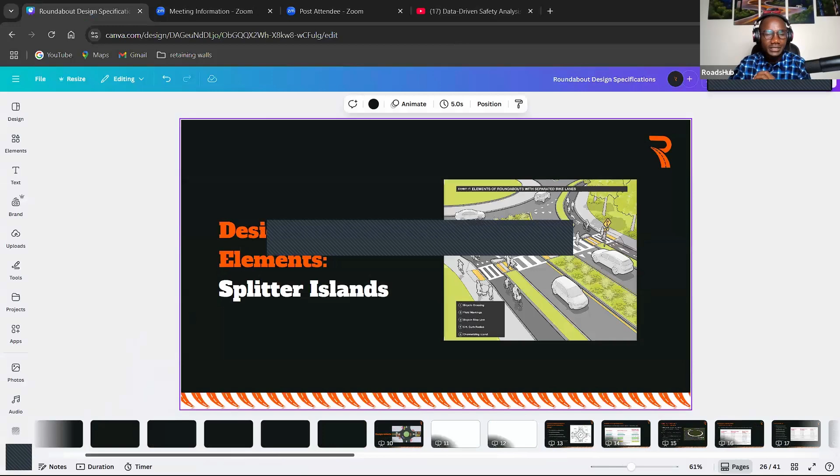This is going to be one of the best sessions that you've attended about roundabout design. That is my commitment, and I hope that I'm going to deliver exactly that.

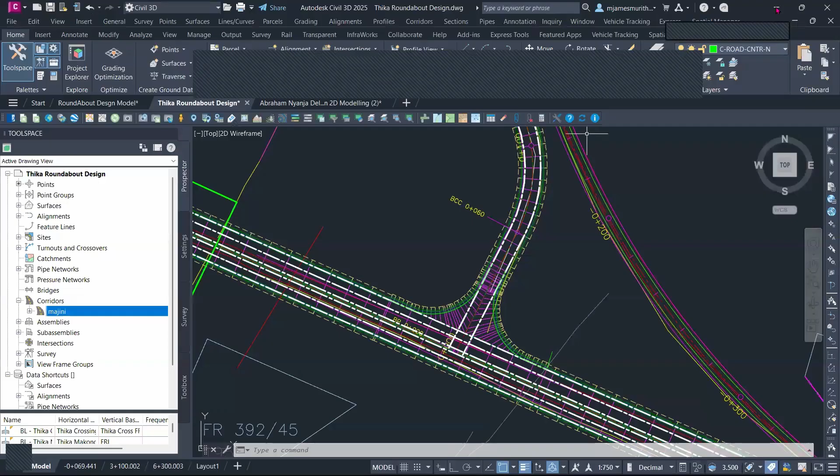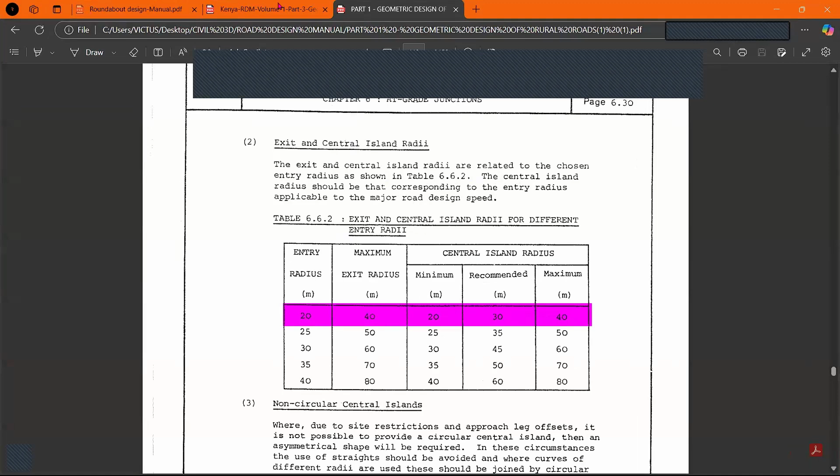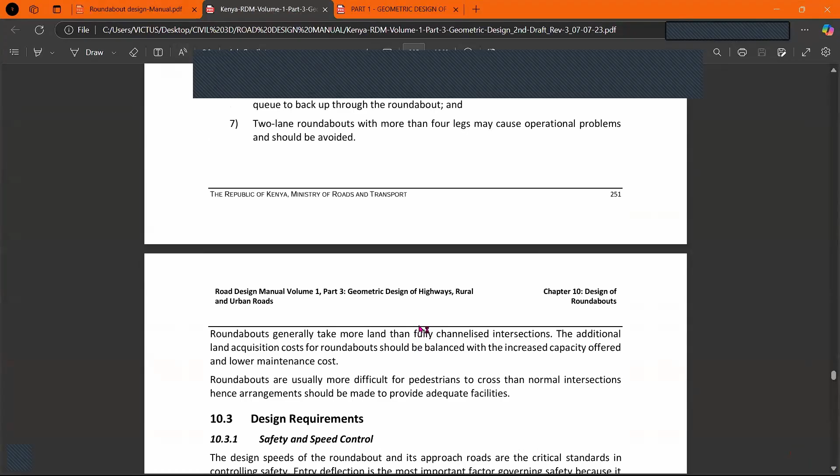So let me jump from this presentation, and I want to look at something that guides our approach in terms of choosing the appropriateness of a roundabout. And these are the guiding principles that you will always endeavor to look at: the road design manuals. The road design manuals will typically give you guidance on some of the scenarios and situations and how you need to apply the engineering designs.

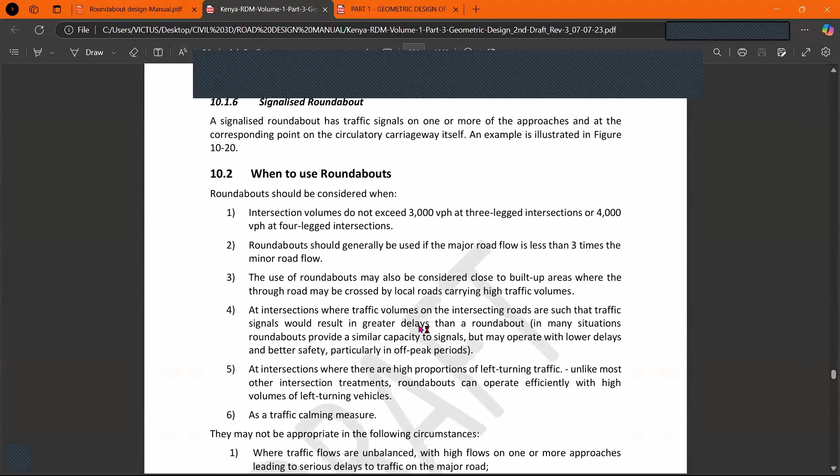So let us, for example, look at roundabouts. This is the Kenyan Road Design Manual. I'm going to send it to you guys. And it is telling us when to use a roundabout and when not to use a roundabout.

So for example, the traffic volume, that is intersection volumes, do not exceed 3,000 vehicles per hour. So if the traffic is less than 3,000, then we can be able to recommend a roundabout at that point. The second one is when the major road flow is less than 3 times the minor road flow.

So what do these two options represent to us? It means you must be able to carry out a traffic survey. So in the traffic survey, you will have estimated the traffic volumes within the two intersecting roadways. That is how you check the two options.

The second one, the use of roundabout may, and this is something that I've always emphasized. When you're reading and interpreting road design manuals, just like the Constitution, because this is the Constitution that guides our craft, you need to understand key words. The first one, should. Any time that you're seeing should, it means it's a recommendation and it carries some weight.

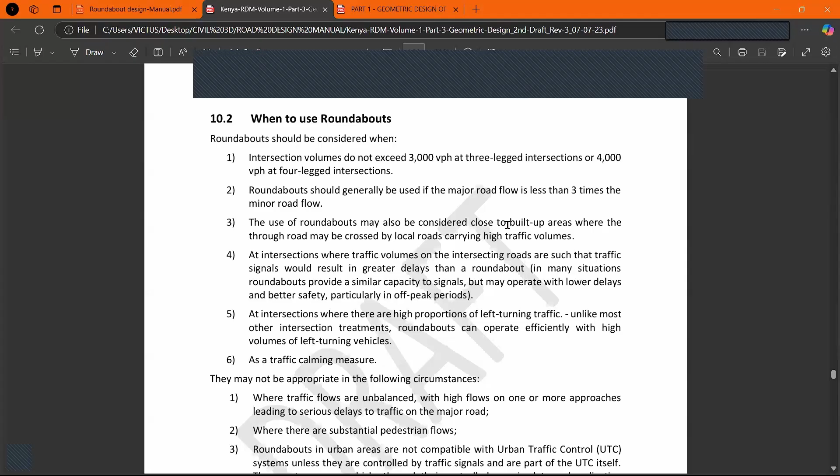Okay. All right, great. So those are three key ones that you need to look at. The use of roundabouts may also be considered close to built-up areas where the through road may be crossed by local roads carrying high traffic volumes. You will also be looking at this as a traffic calming measure. So if you want to control the traffic in a certain area, then you can propose a roundabout.

But then there are scenarios where it may not be appropriate to provide a roundabout. Number one, the traffic is unbalanced. That means you have high flows on one road, or more approaches leading to serious delays. So in such a case, you cannot provide a roundabout.

When there is also substantial pedestrian flow. In such an area, when you're designing a roundabout, you're going to provide a splitter island. And once we provide a splitter island, we're going to provide, of course, the crosswalk and all of that. If the pedestrian flow is very high, it means they will be crossing far too much, and there's a high chance of the roundabout being fully blocked.

And then in urban areas, for example, where it is not compatible with urban traffic control, then you may not be able to propose that. But if it is connected with the urban traffic control systems, then you can be able to recommend a roundabout. In presence of reversible lanes. So reversible lanes technically means these are lanes that

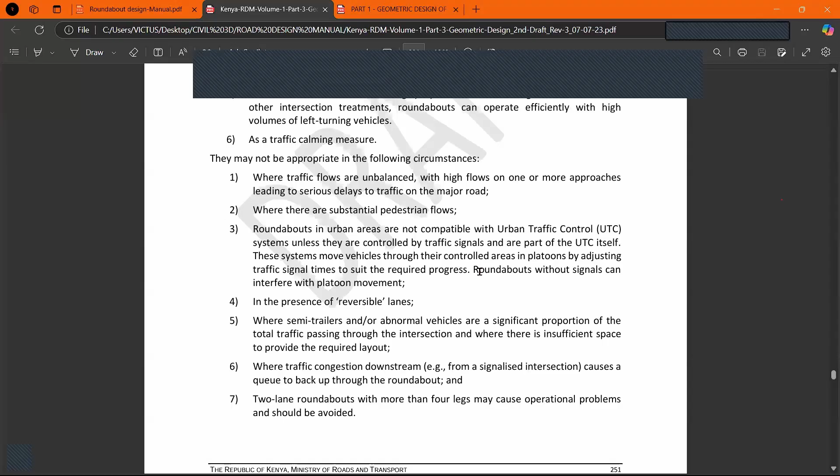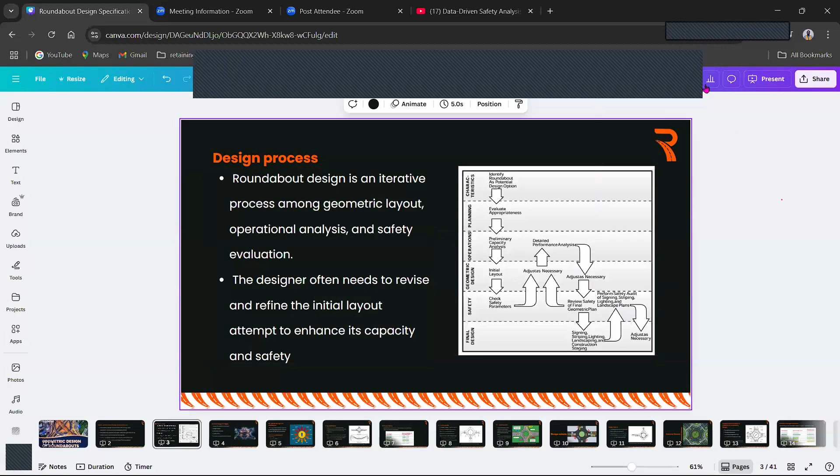I think it's a case study in Tanzania, where there is traffic that is moving back. You're having like U-turns around the same section. And then where there are very many semi-trailers and abnormal vehicles, you will require a very big space of land to construct a roundabout in that specific scenario. So those are some of the areas that you need to avoid, and some of the areas where you need to recommend the use of a roundabout.

So that is always the first stage. The characteristics. What are the surrounding site conditions? Is it a viable option? Then after that, you will do evaluation of appropriateness. That is where, after doing the survey, you evaluate the data. You analyze the data. You see these volumes. Is the ratio of 3:1 appropriate?

What is happening? Is the traffic flow in the major road extremely high, and then in the minor road it's very low? In such a scenario, you cannot be able to provide one. So after you have done the evaluation, for example, the traditional method that we used after having your traffic survey is just to use Excel and Power BI to compute the traffic characteristics, traffic flow, volumes, capacity, AADT, and all of that to get these figures that you use to make decisions.

And then after that, you can see operations. You also carry out preliminary capacity analysis. In the capacity analysis, you can use HCM, Highway Capacity Manual. That is the main guideline when you're evaluating the capacity analysis of any roundabout.

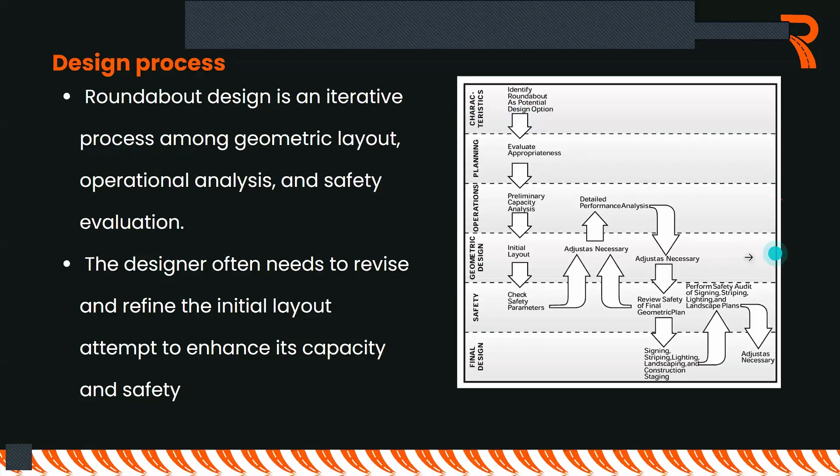And then after that, it's an iterative process. That's why you see safety, geometric design, and the final design, they are iterative steps that you need to look at. So then, if I was to summarize all of those stories in 5 specific things that we are going to talk about in this program, number 1, you need to account for the speed through the roundabout. That is an important aspect. What is the speed? How do you control the speed through your roundabout?

Remember, one of the operational principles of a roundabout is to ensure that vehicles are entering. You are forcing, the geometry forces the vehicles to slow down. Therefore, it means the speed analysis is one of the critical pillars that we must be able to analyze.

The second one is the design vehicle. For example, when you're designing a 2-lane or a multi-lane roundabout, you always consider a large truck vehicle, for example, WB40, and then a small vehicle. That's the design vehicle. You need to think about what are the turning characteristics. After that, you'll be looking at different geometric elements. When we talk about different geometric elements, you need to think in terms of what is the relationship? Do they communicate? What is the functionality of each geometric element in a roundabout?

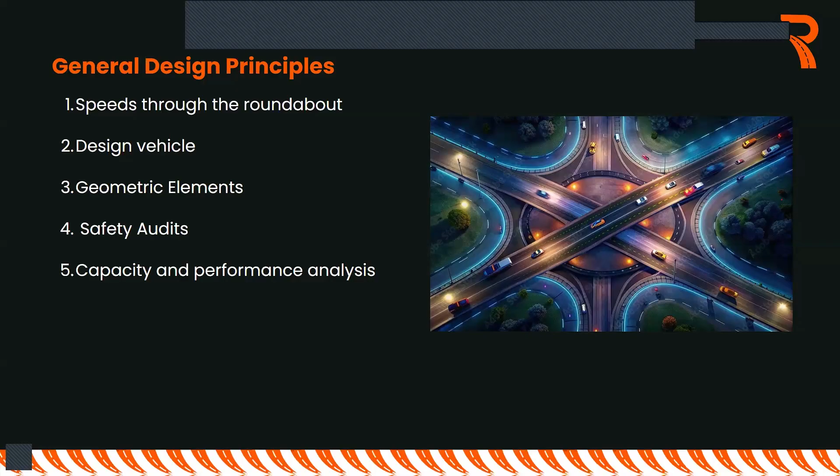Of course, safety audits, this is connected with the speed analysis. And of course, after that, you will then check the capacity and performance analysis. So let's look at this one. Speed through a roundabout. Look at this crazy vehicle that is here. That is what happens at a roundabout. If you design a poorly designed roundabout, that is what is going to happen.

Crashes. Remember, in a roundabout, vehicles can approach the roundabout at almost 360 degrees. I mean, this is my crazy view, don't take it seriously. But I want to magnify how risky it is if you don't think about the traffic or the speed flows and profile across a roundabout. So the most critical design objective is achieving appropriate vehicular speed through the roundabout. And this is achieved by doing 4 things.

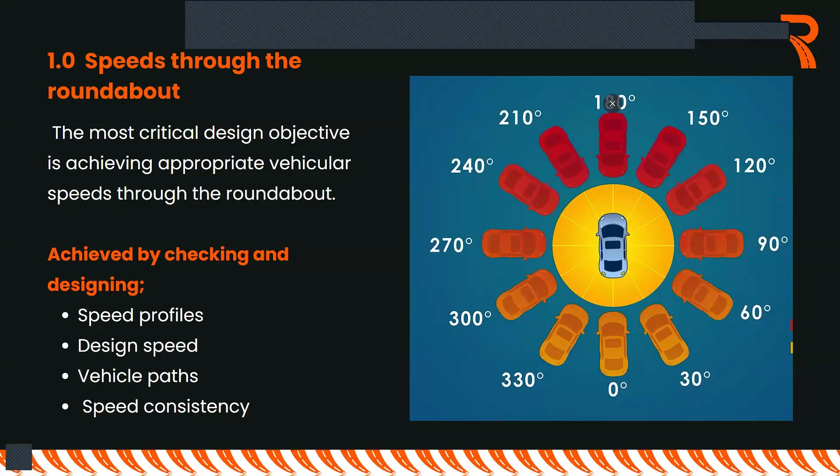Number 1, checking the speed profiles. How do vehicles behave when they are approaching a roundabout and exiting a roundabout? Number 2, what is the design speed? What are the vehicle paths? So there is the speed profile, but also the vehicle path. How do drivers navigate a roundabout? And then after that, you need to think about what is the consistency of the speed around the roundabout. So this is it.

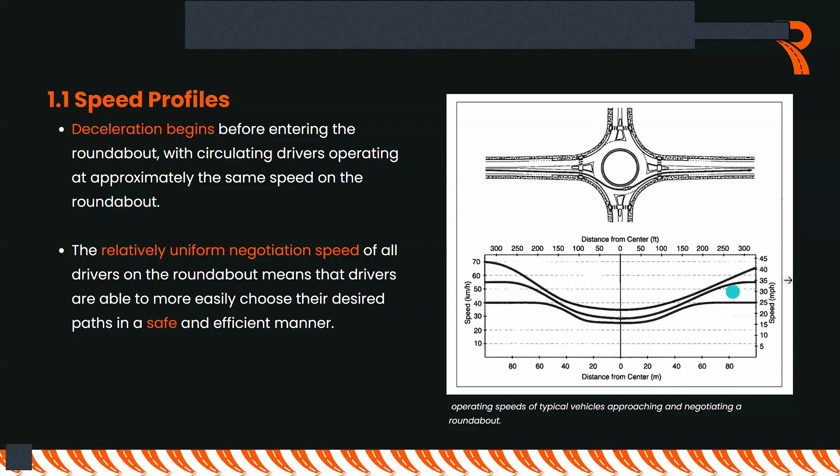And this is very important. Some of the old design manuals used to give recommendations for the design speed of a roundabout based on the speed of the major road. So for example, you are in class A roads, and therefore the speed at that point is 80 kilometers per hour. That is out; you cannot design a roundabout with such a design speed. So when we are talking about the design speed of a roundabout, we are talking about entry design speed.

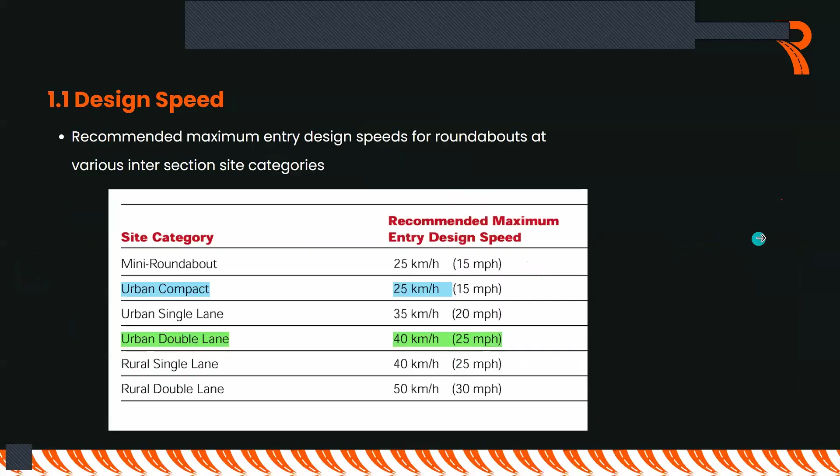And then we jump to the next one. Remember this. This is the flow. You must get it before we go to the practical session. You must get the flow. So keep that in mind, and you will see how that applies or how that plays out.

Now, the vehicle path. Drivers along a roundabout don't just drive. For many people, you know that drivers negotiating or interacting with a roundabout is a crazy thing. That is why when you go to the driving school, the board, I don't remember the board. Please give us the name of the board that you use in your local driving school.

I think for us it was called MTRB or something like that. And this is it. This is it. And if you actually search design of roundabouts even on YouTube, most of the videos that come up are about how drivers should be able to negotiate a roundabout.

This is interesting. Why is it interesting? Because as the design engineer, you keep switching your personalities during the design process. So you are thinking as a technical guy, and you are talking about design profiles, speed profiles and all of that. At this point, you also need to think as the person who is driving. Now, this is the other thing. You also need to think in terms of, am I driving a large vehicle or am I driving a passenger vehicle? Over and beyond that, you should also think about being an elderly person. How will this play out for them?

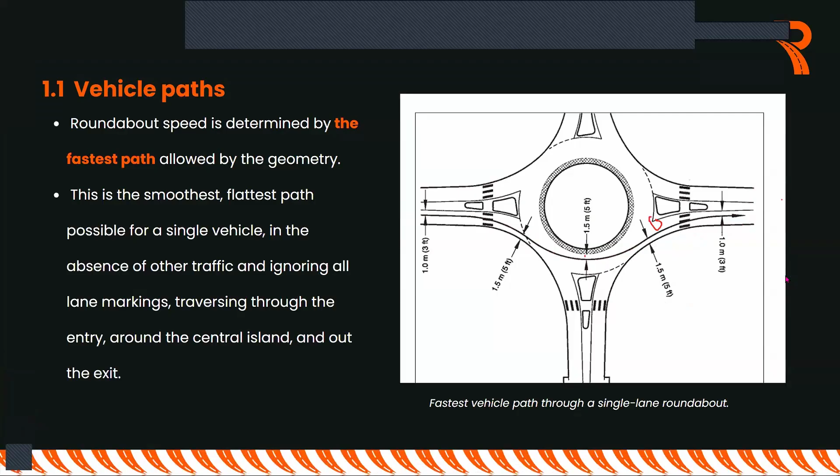So for you as the design engineer, you must be able to visualize. Most people want to use software to visualize. No, you are the creator. You must visualize the path in your mind before you put it on paper. I'll show you where the manual is also recommending that. So let's move. So we now understand the vehicle path. We understand how the drivers will be interacting with our roundabout.

Now, let us look at it on a bigger scale. The reason why it is important for you to understand the vehicle path is because when you go to AutoCAD, I remember this gentleman, Philemon. He was a brilliant guy in one of our trainings. And he was texting me and saying that he was designing a roundabout in AutoCAD, and it was a super exhausting exercise. You cannot create what you don't picture. You cannot create what you don't understand.

And this is why we are looking at vehicle path. How will different vehicles be interacting with the roundabout? So that as we go to design the different geometric elements, which you see all of them in this drawing, we can know what is their interaction, what is their relationship, how do they guide the vehicles through the roundabout. So let's get into it.

We are assuming the person who was here was driving on the right-hand side. So we are driving from the right-hand side. So we are here. Let me change the color to blue. There's no blue here. So this is where my friend Farouk is driving through. So when Farouk is at this point, and I want you to go back to your driving school, he has a lot of options.

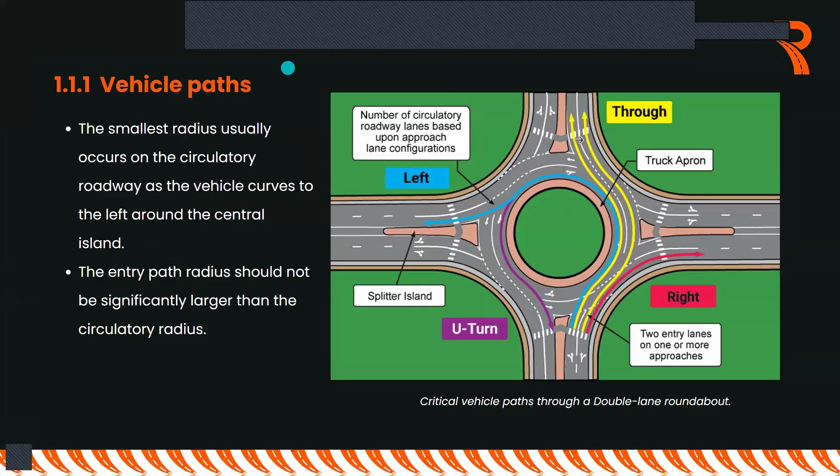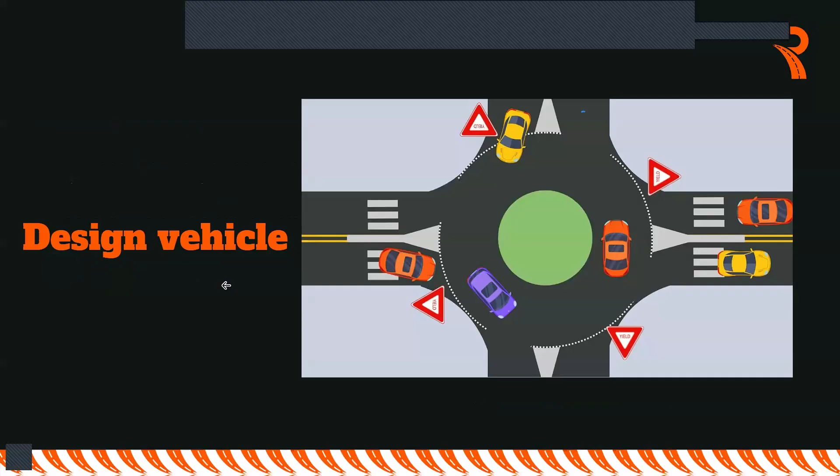So after we have understood the whole vehicle paths and all the chaos that happens through this section, we need to think about the vehicle now. We are getting into the vehicle. In this case, we were thinking as a driver. Now, let us think from a different perspective. We are talking about the design vehicle. So what is the design vehicle? A design vehicle is basically a guide. It's a guide that allows the design engineer to be thinking with someone in mind. So if you don't have someone in mind, you can think with a vehicle, all right? So this is a design vehicle. You need to know your design vehicle so well.

For example, how do you arrive at that? Number one, you need to carry out a traffic survey. The traffic survey is mostly carried out in 7 days, where you must have 5 working days and 2 weekend days, and then you must do some 24-hour counts, others 16-hour, and all of that. So the rule of thumb is we design for the worst case scenario. Therefore, you are going to design with the maximum vehicle from your traffic survey. So if it's an articulated truck, if it is a WB40, if it's a bus, whatever, then that becomes your design vehicle. So in that case, you'll be able to know the different design parameters.

The designer must be conscious of the design vehicle and possess the appropriate vehicle turning templates or a CAD-based vehicle turning path program to determine the vehicle's swept path analysis. When it comes to design of roundabouts and intersections, Autodesk Vehicle Tracking and many other CAD programs are always the best. So look at it here. I want you to picture this, and we'll be doing it right now in one of our designs and see how the swept path analysis is done.

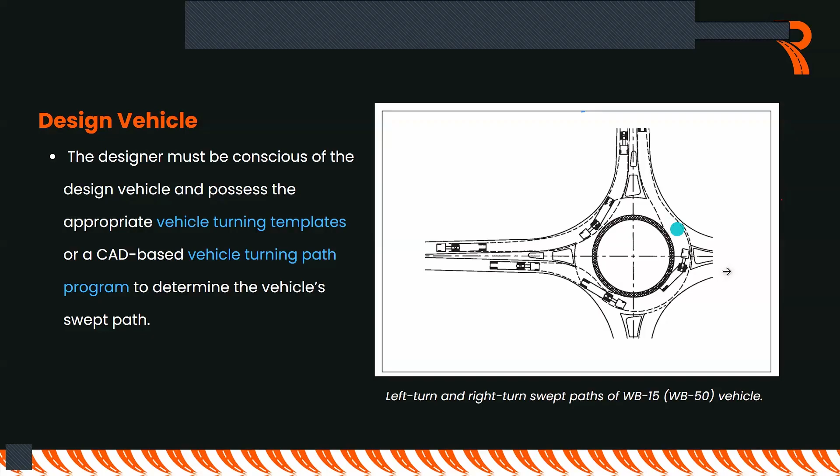And then after you know those important aspects, that is when now you start thinking about the geometric elements in a roundabout. So I am mapping out the process for you. Brilliant as you are, sometimes you may not be having all the data. But at least when you understand the process, you can be able to make what is called educated estimation. So you'll be able to know in such a scenario, I need to do 1, 2, 3 things.

So let's get into this one. These are the different roundabout elements for preliminary design. I'm not going to spend my time to go through these elements because they are self-explanatory and easy to read. But I want you to think about 3 main things that you need to keep in mind. Number 1, you must be able to select the optimal roundabout size. Anywhere you learn, or anywhere you read online in books and everything, the disadvantage of a roundabout is that it requires huge space. Therefore, for you as the design engineer, you must be able to get the optimal roundabout size.

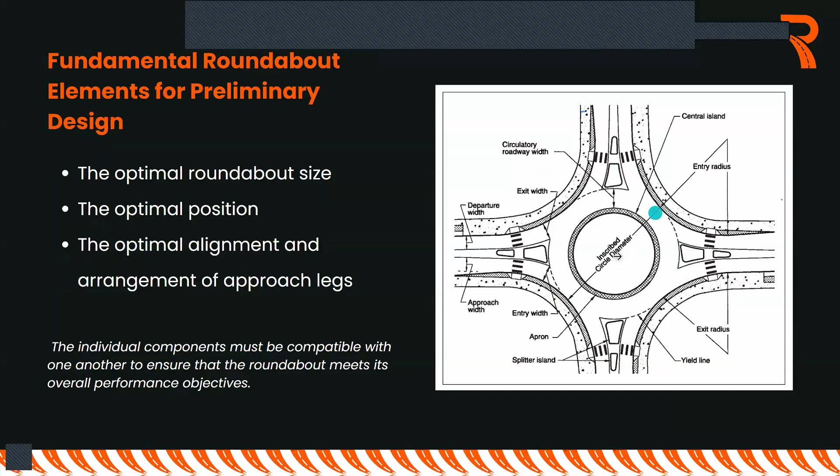The assumption and always the best case scenario is that the angle between the entries is 90 degrees. And for optimal performance, we are also talking of 4 legs. You also need to think about the typical design vehicle. Remember, the word here is typical. For a mini roundabout, we are using a single unit truck. And therefore, we have recommendations for the inscribed circle diameter range, including the circulatory lane, the diameter of the central island, and the apron. Depending on the type of roundabout that you adopt, you may not be able to include the truck apron. Please take a screenshot of this.

Let us say, for example, we are designing an urban double lane. You see that we are recommended an inscribed circle range of 45 to 55. So you have 10 meters to play around depending on the site conditions and any other analysis. So note that down. Inscribed circle is equal to 45 to 55 meters. Remember also the type of vehicle. It's WB15 or WB50. Those are the two options that we have there.

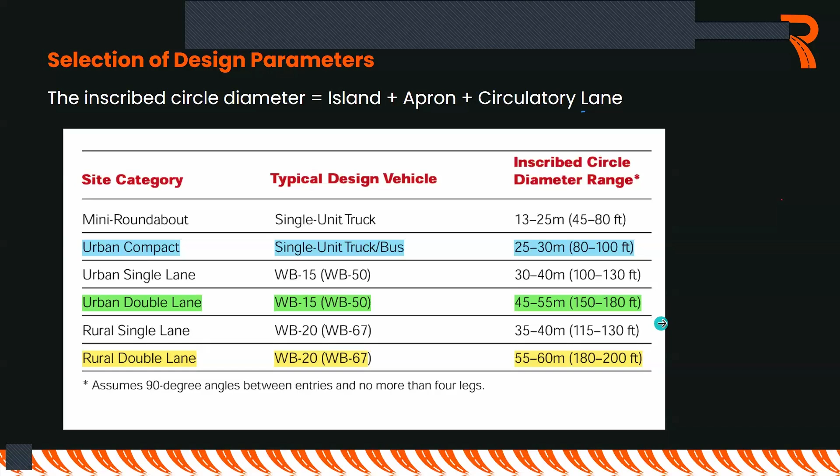Let us go. The circulatory roadway. So what parameter do you use to decide the width of this roadway? Number one, this is determined from the width of the entry, and it is always 1.2 times the width of the entry.

Of course, truck aprons also depend on site conditions. So if you have a lot of large trucks that will be using your section, then you can provide the truck apron. If you're using a mini roundabout or a compact roundabout, then the truck apron may not be necessary. There is always a modification that is needed. But remember also, this is a case-to-case application.

Then remember also the swept path, the minimum clearance. You see that at the edges of your circulatory roadway, you must be able to give a minimum clearance. This one allows for the overhang of the vehicle and all of that. So you don't design your kerbstone directly at the edge of your circulatory roadway. You need to give some minimum clearance in that case.

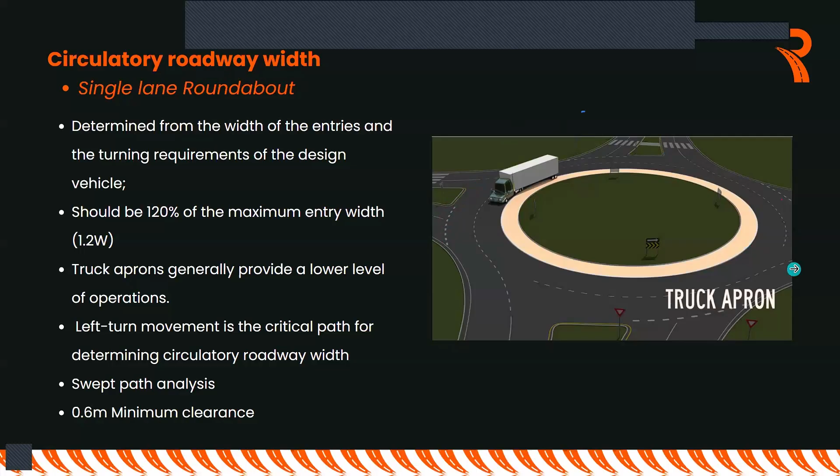So come with me, please. Don't leave me. Don't leave me.

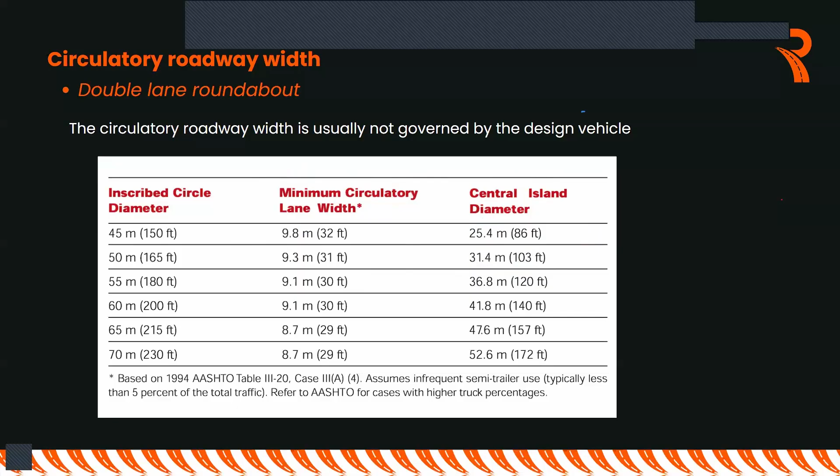Now, after that, I want you to see the math, right? We are saying after we deduct the circulatory lane width, we are left with the central island. And the central island for this case is ranging between 25.4 meters all the way to 52.6 meters. Why does the manual give us a range? Because it allows design flexibility. It allows us to customize these various aspects according to our site conditions.

So the central island of a roundabout is the raised, non-traversable area encompassed by the circulatory roadway. This is where you do the landscaping for aesthetics, and it should also be raised. I remember Farouk was talking about the drainage of the central island. How you design the central island determines how the drainage of your section is going to look.

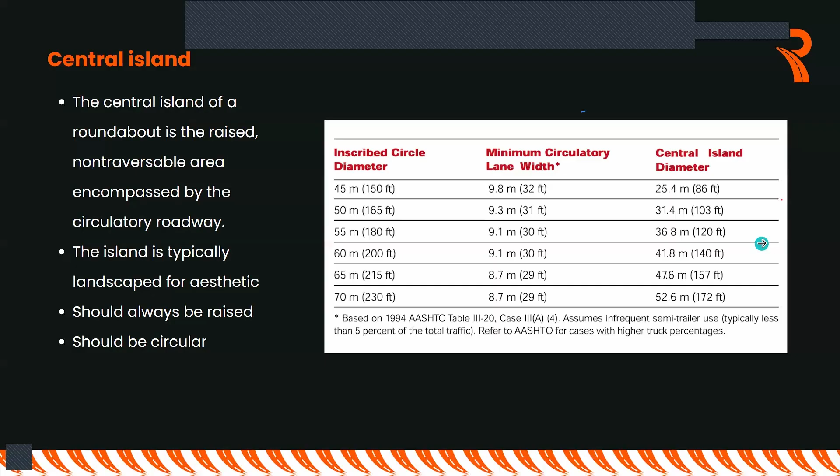So mostly you'll note that the circulatory roadway is designed to drain water away from the curbs or from the roundabout, so that the roundabout becomes self-draining. We also say that we use reverse super elevation. The beauty of reverse super elevation is the drivers will slow down naturally. The geometry forces them to slow down. And then also it drains water away from the roundabout.

And the other aspect is the super elevation in that case should not be 4%. It is always around 2% to 2.5%, because if you increase the super elevation to 4% within the circulatory roadway, trucks will start offloading without any request or signal. I hope you understand that case.

So the other thing is the entry width. The entry width, this is where I was talking about, is the distance from the edge of the splitter island to the edge of the curb. This is very important. If you're designing for a double lane, we always consider two scenarios.

You will have the large truck, and then you will have a passenger car moving on the outer lane. This tries to simulate an actual scenario, because large truck drivers will not even want to negotiate a roundabout when they are in two adjacent lanes. It's a recipe for an accident. So mostly you will notice that we use a large truck and a passenger car when we are designing the entry width.

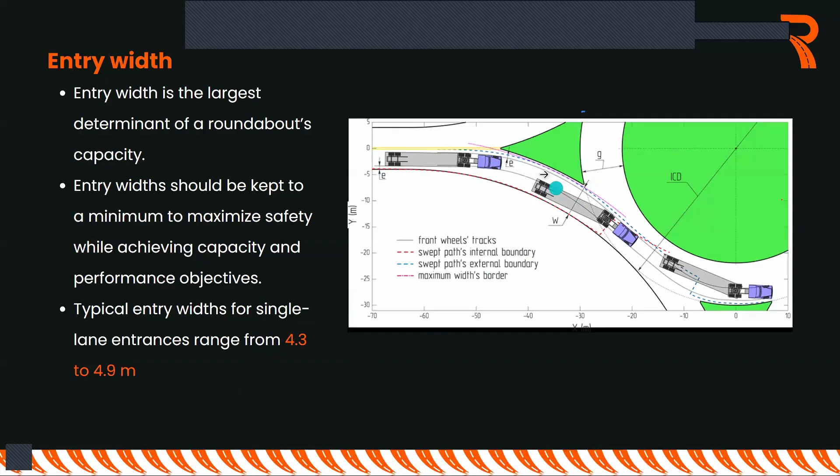And it is normally between 4.3 to 4.9 meters. So note that down. Entry width is between 4.3 to 4.9 meters. Remember the reason why it is wider than the lane. In this case, we are not talking about a lane of 3.5. The lane of 3.5 terminates at this point, where the speed profiles start to vary. So with this curvature of the geometry, you will find that these sections are naturally wider.

After that, there's entry curves. This is the interesting bit, and I love it. Why do I love this bit? Listen to this. The entry curves are the set of one or more curves along the edges of the pavement of the entry roadway leading into the circulatory roadway. I want you to go back to what we talked about initially, that the main operating principle of a roundabout is the geometry forcing the vehicles to slow down.

How do you do that? It is through the design of the entry curves. Now, this is the conflict that happens. As you're designing the entry curves, it is important to note that if you constrain them too much, you will find that you will affect the performance of your roundabout. So, a balance between the two. Now, listen to this.

The entry curve is designed curvilinearly tangential to the outside edge of the circulatory roadway. I wish that I had all the time to do this with you people, but that's why I'm packaging a course on the design of a roundabout, and of course include some intersections here and there.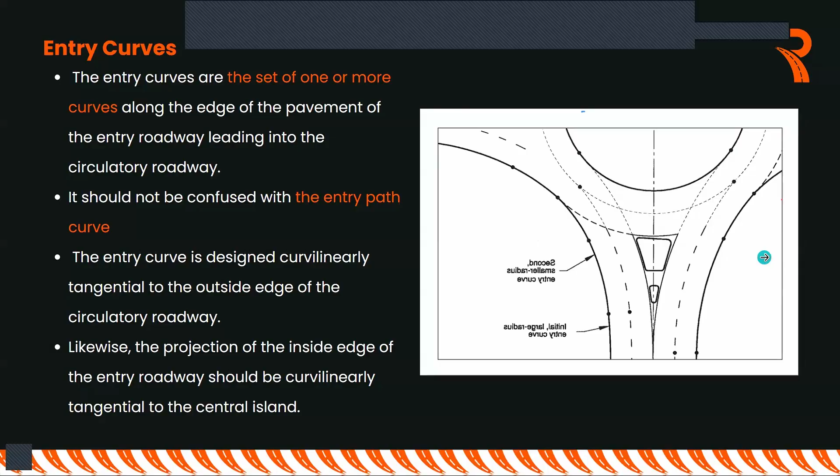Why? These entry curves, and of course the exit curves, because that is what is next, they determine how vehicles will slow down, how they will get into the roundabout, the accidents that will occur, how drivers will behave, the vehicle path, and all of those processes. So this is a critically important part of this one.

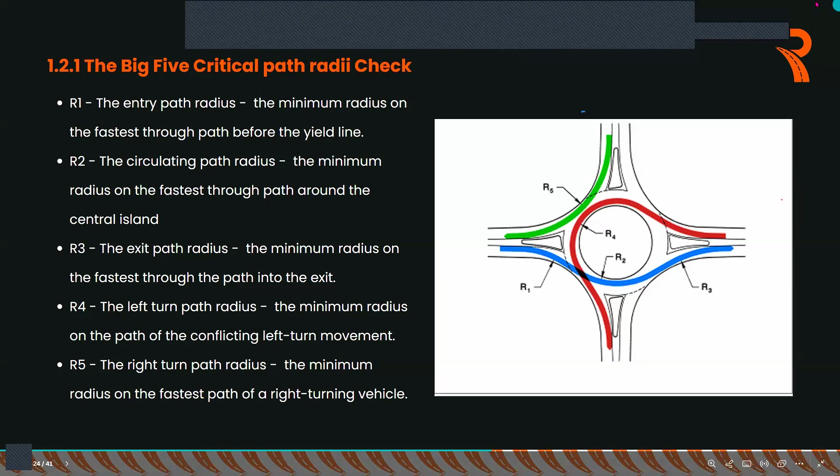So I want to just move quickly to this other part. And you see, this is how we carry out the design check. So I want us to go now to the other part, the practical bit. I cannot complete this today, and I know I can't. But I want us to go now to the practical bit of this design. How does it look for us applying those principles? So let's get into it right now, right here.

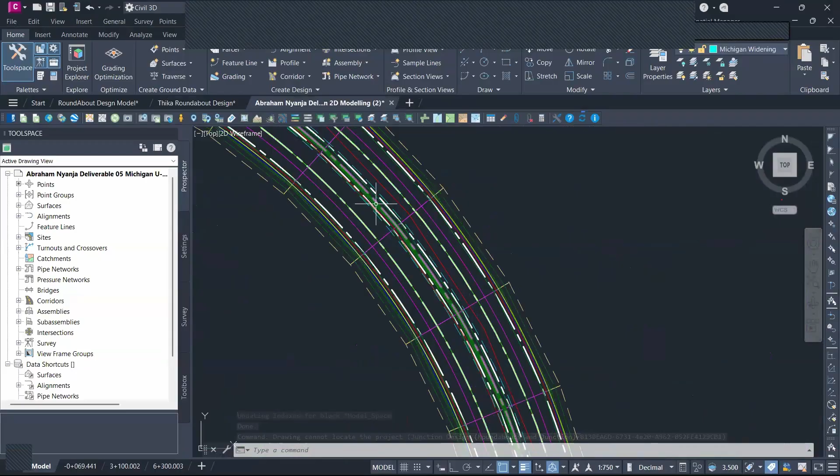And I'm going to open my Civil 3D design. And I want to open one design that was done by one gentleman that is already here with us. He is called Engineer Abraham Nyanja from Uganda. Such a proper gentleman. Now, I want to talk about something. I'm talking now in terms of practical approach to designing roundabouts.

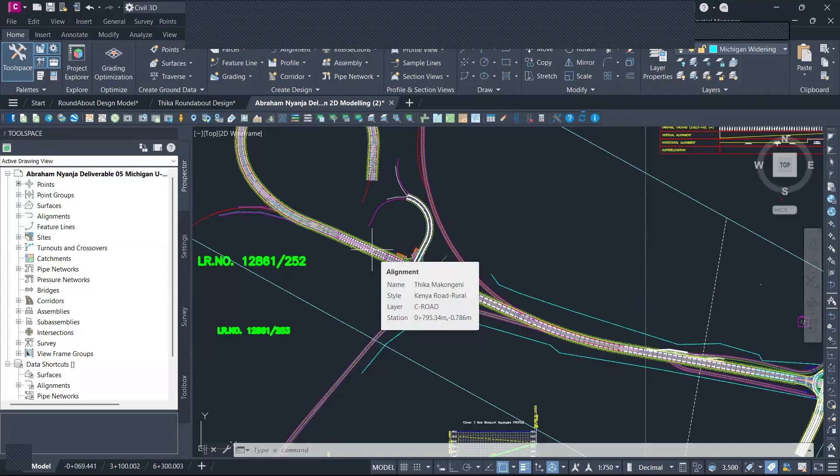I'll be addressing them. Now, when it comes to the practical design of roads, you need to think of it as a holistic exercise. What do I mean by a holistic exercise? You will always find a mix of different design elements and needs.

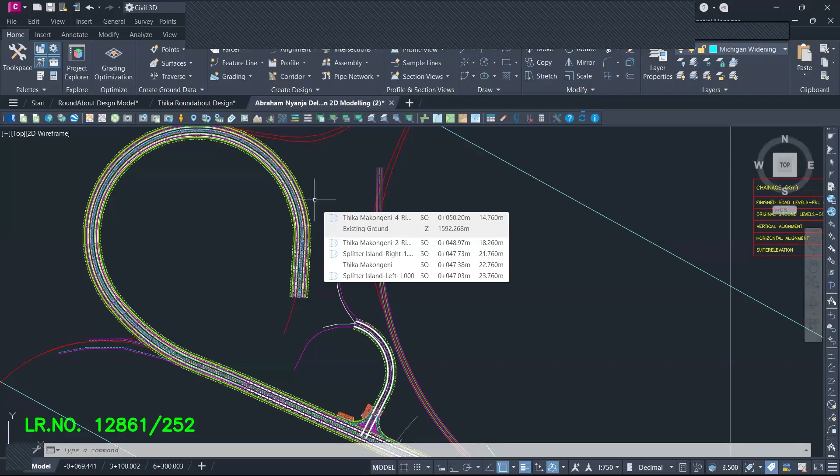For example, in this project, we have a crazy loop here. This is more of a trumpet. Is that a trumpet? Something like that? Because there's a major road that is passing someplace here. I think I just omitted it. So this is more of a trumpet intersection that you have here. We have some loop roads all over this place.

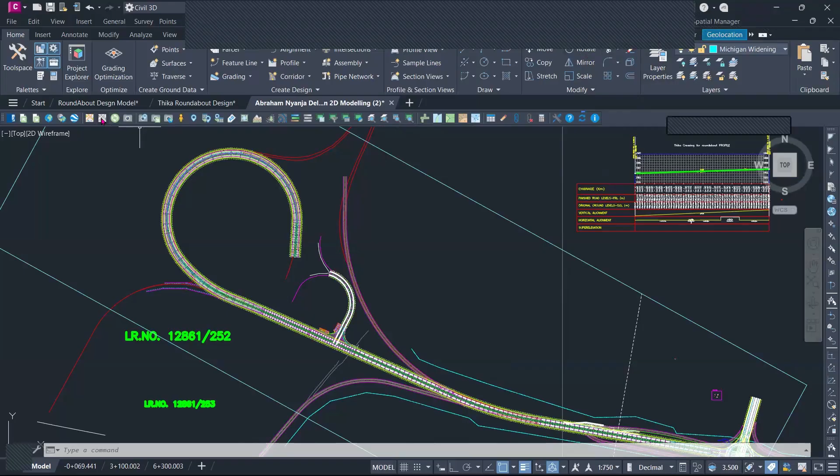Let me actually take you guys to site. Allow me to take you to site right now. My guys from Macedonia, from India.

I'm taking you to Kenya right now. You don't have to pay any fee. I'm taking you to this crazy place. Look at it. So we are on site. And I want you to think of it now, the holistic approach that I'm talking about. And this is why I want you to be a really, really good engineer.

Mohammed, I know the site is amazing, so please don't write. I will write for you.

So this is the trumpet intersection that we're talking about. So how do vehicles maneuver here? Because for you to become good in designing any project, for you to be able to apply all of this theory that you've been going through, you must be able to understand the vehicle movement pattern. This can only be perceived by you being on site and doing nothing other than observing.

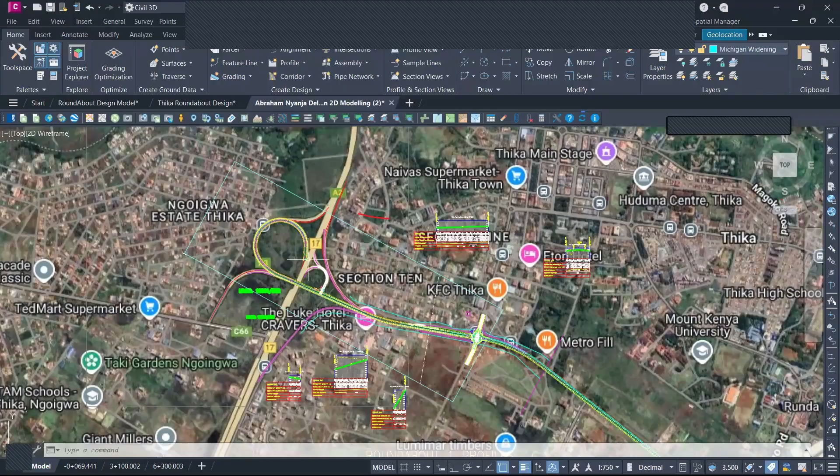So I want you to go back to the traffic study and some of the recommendations where we talked about situations that are appropriate for a roundabout and the ones that are not appropriate. So such is a scenario. So you cannot propose a roundabout in such an instance. The traffic in A2 is super crazy, almost 4 times, 5 times probably what is in this other road. So you understand the traffic.

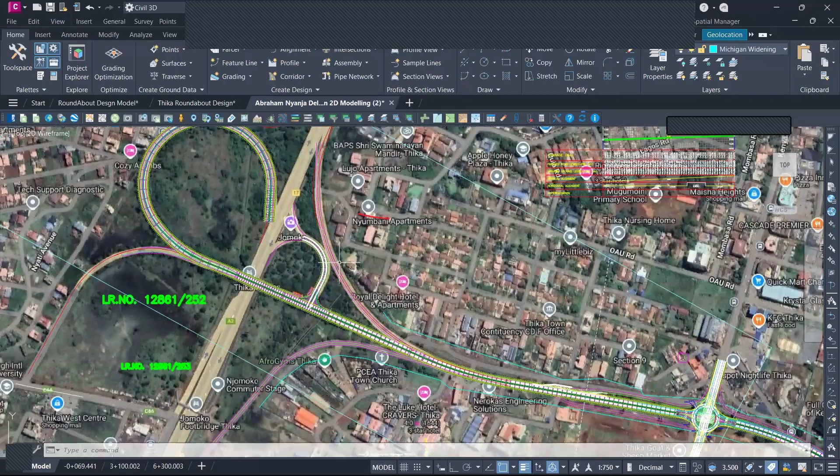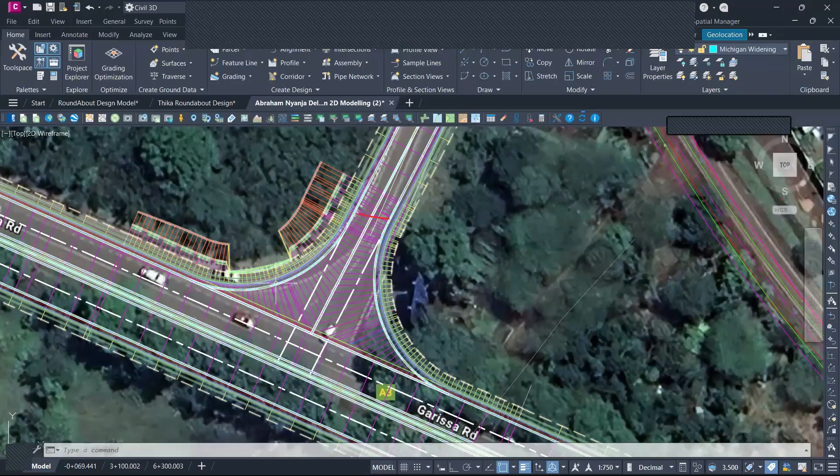This is a loop. So in your design, you'll be able to do a loop. So this is a loop from this section. It's getting back to the major road. You will also have some, I forgot the name for these roads, but anyway, whatever they are, you can see all of them. And therefore, you will also need to do intersection design. So how do you perceive intersection design in this case? So this is one single intersection that you'll be designing in this specific case.

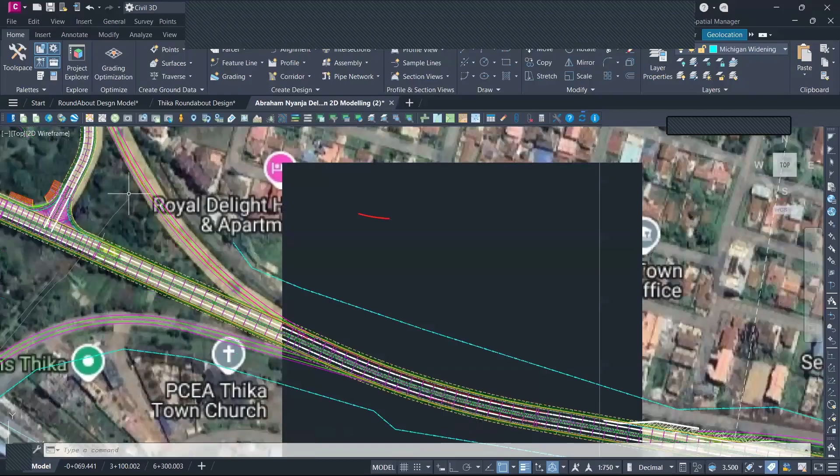So after that, we'll move all the way and you can see there's traffic merger. So this means you also need to design for acceleration and deceleration sections here. So the traffic is moving from the loop road in this case and getting into the major highway. So you need to figure out what design elements you need to apply here for traffic mergers, minimizing conflict. Interestingly, at the very same point, or probably within the same region, we are having another road that is exiting from the major road.

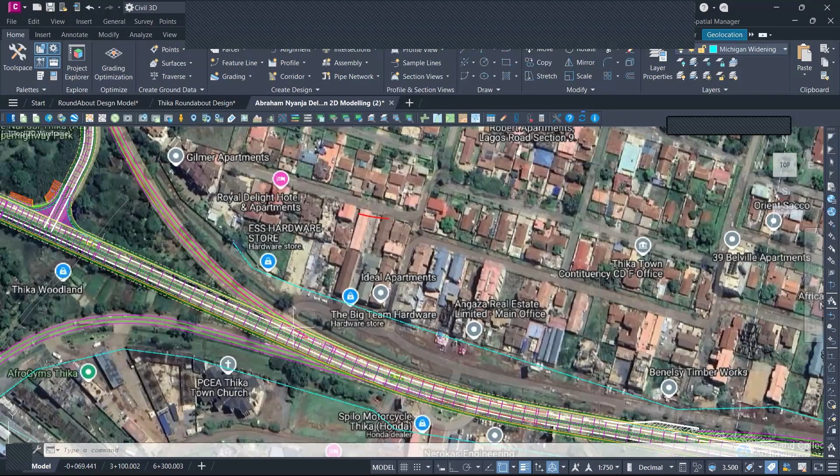So, Mr. Design Engineer, Madam Engineer, what are you going to do about that? What features are you going to provide that are not going to obstruct the traffic in the major road? Remember, when you're designing any element, the priority is always on the through traffic. I'll leave that for you to digest.

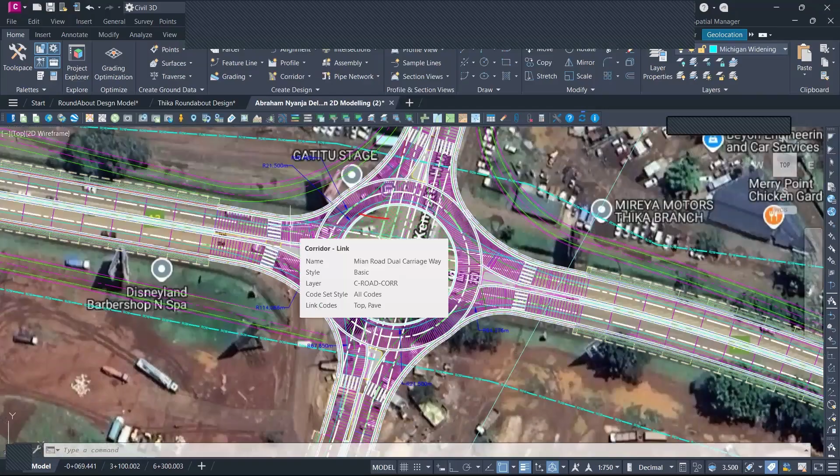Now, let us get to the holy grail of what we've been discussing today. So this is it right here. And we talked about one principle. Number one is, we need to provide a roundabout in an instance or in an area where the traffic in the major road is less than 3 times the traffic on the minor road.

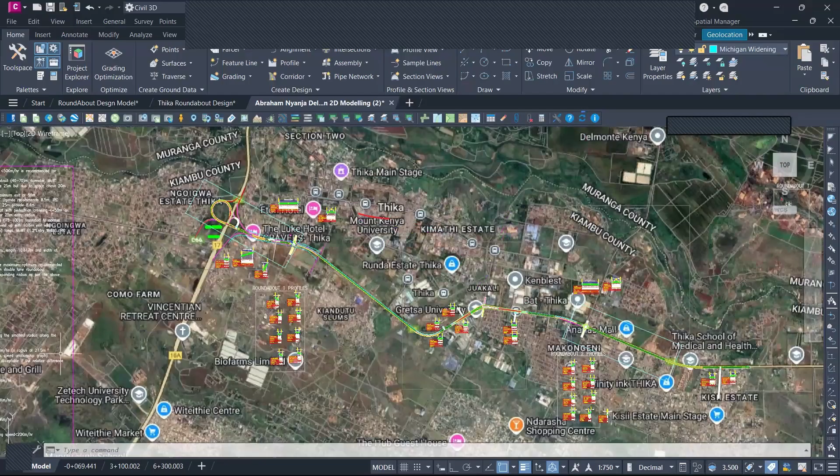So this is the minor road that you can see is going to a bush somehow. Anyway, it's a way to offload traffic, but it's joining the A2 road someplace all the way up here. So this means that the traffic flow on this side will be very minimal. And therefore, we can at least provide a roundabout in such a scenario.

The other point is, if you wanted to give priority to the major road, then you can have an overpass that is carrying traffic in the major road, and then you need to design service roads that are going to carry the minor traffic that is coming from the town here. So those are 2 recommendations. So yes, you can have the roundabout for the service road, and then you have an overpass for the major traffic.

So these are scenarios where you find the traffic of the major road is a little bit above the 3,000 vehicles per hour limit that is given in the road design manual. Of course, naturally, if you do analysis using PTV VISSIM, and also using HDM-4, you will always find that that is a mark. The 3,000 is not guesswork.

It's something that is practical there. So then, how can you improve? And this is how roundabouts are improved. For example, you improve by introducing the overpass. That means you're carrying a huge chunk of the major traffic flow of the through traffic over the roundabout.

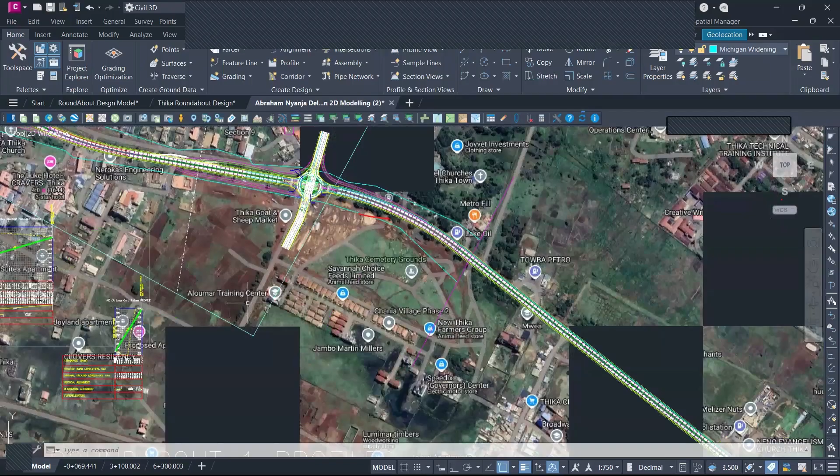So one of the major things we can do is provide a loop road here to exit traffic at this point, and also another one, so that the major traffic, instead of going through the overpass or coming to take the left turn at this point, can exit using a loop road here and join the highway ahead. And therefore we will improve the performance of the roundabout at this specific point.

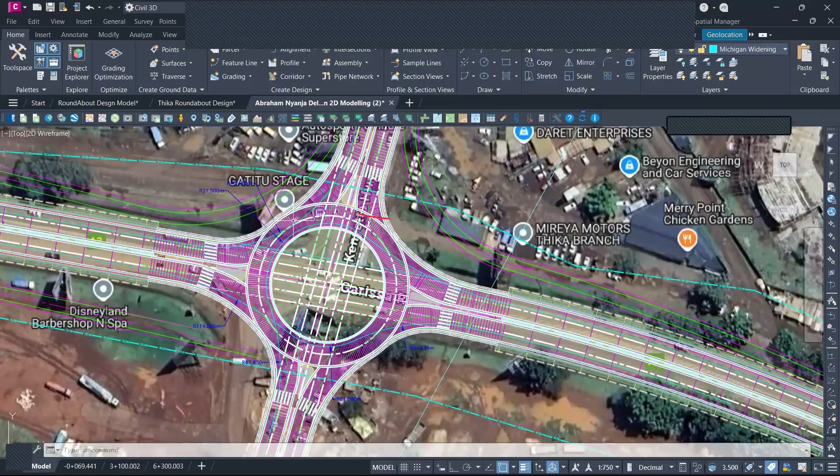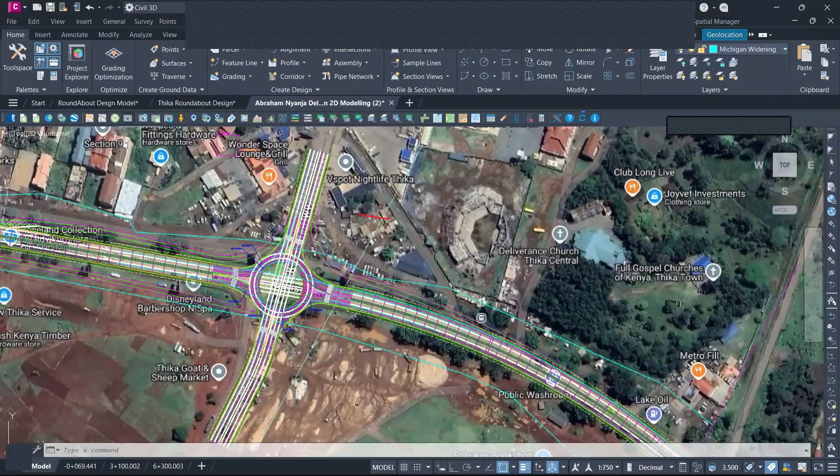So what I'm saying is all of this knowledge should be applied contextually. All of those parameters must be applied contextually to our case here to meet the minimum design requirements. So let's see how this was done in another model. This is the same design project. I've just made a few copies so that you can have a look at some of these things.

So the first thing I want us to look at is we will be driving on the left now. I don't want us to drive on the right, but come with me. Let us drive on the left-hand side. So this is the entry radius. This radius is what we are talking about, designing them to be curvilinear. You can see it's from the edge and it's curvilinear to the edge of the pavement at this point, and it exits to this other edge, right?

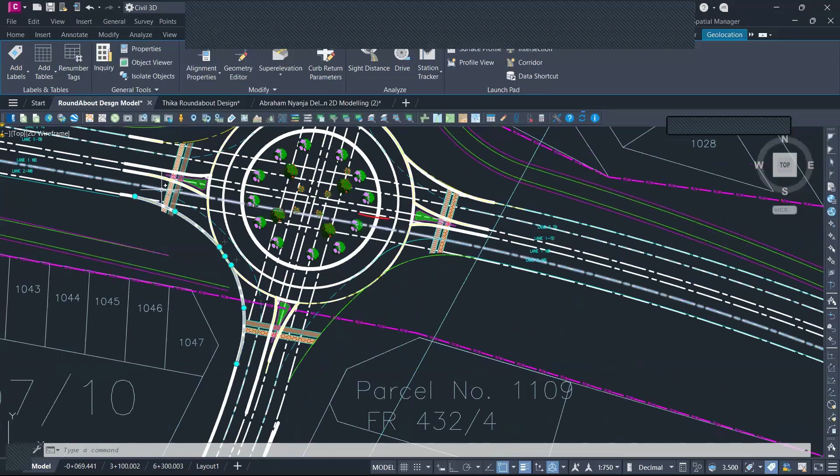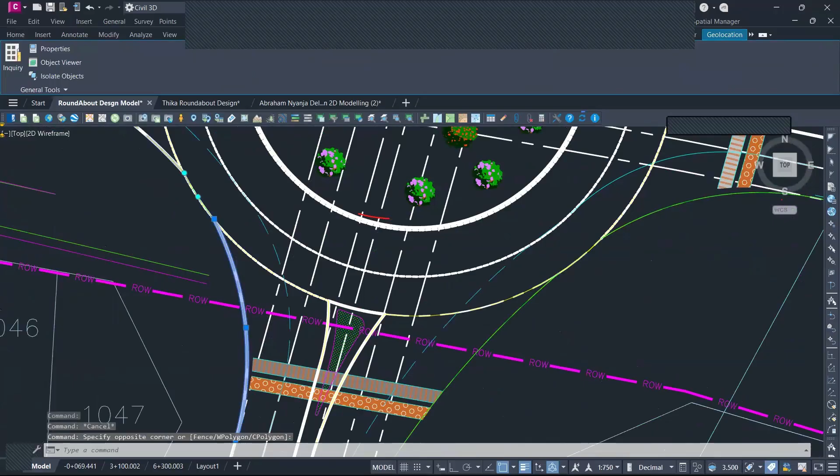And then the other point is, of course, the central one. You can see the curve. It's tangential to the circulatory roadway. I think it is from practice that, when you're designing your entry radius, the rule of thumb is you will always use an entry radius of around 35 meters. There is a road design manual that says that, so I'm not the one.

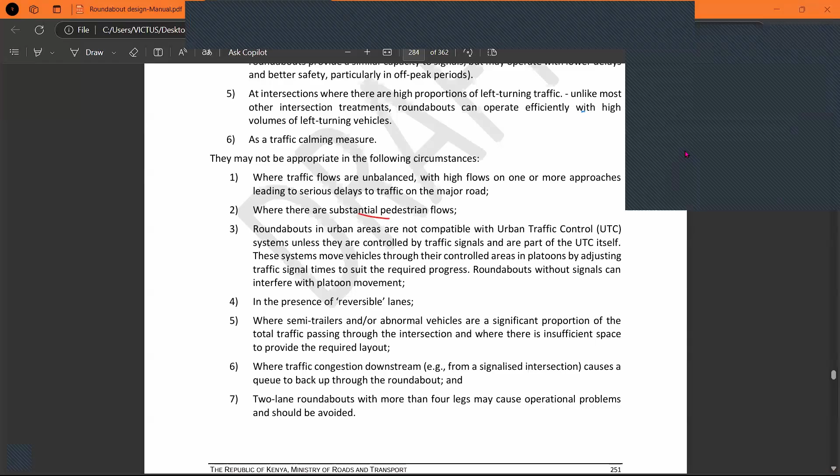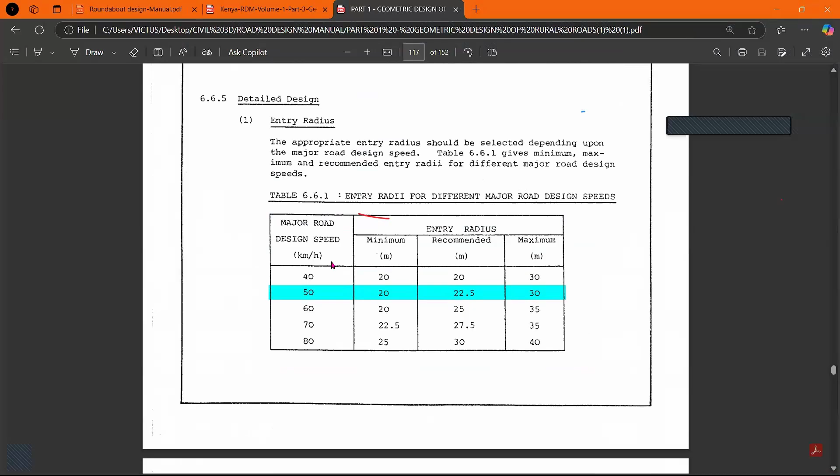And you will note, for example, for an entry, for the design speed that we have chosen, this one is using the major road design speed as a basis for choosing the entry radius. And it will say that for a design speed of probably 50, you can use 20 for all of these. But ideally, the maximum one is always around 30 meters, the maximum radius that you need to use for the entry.

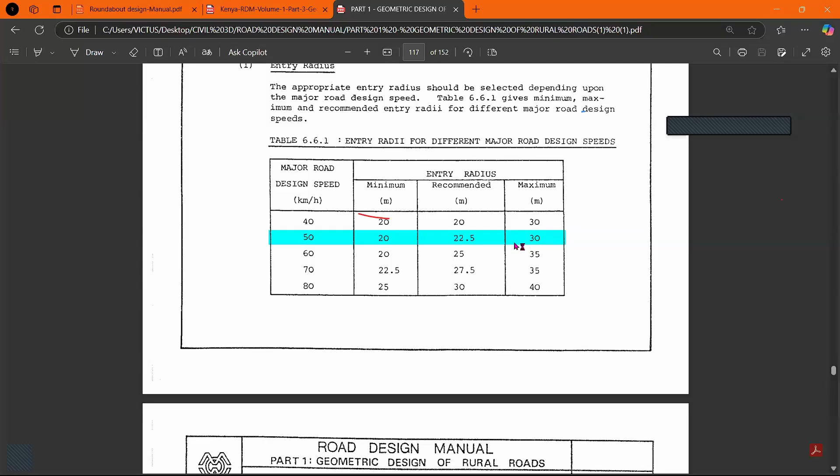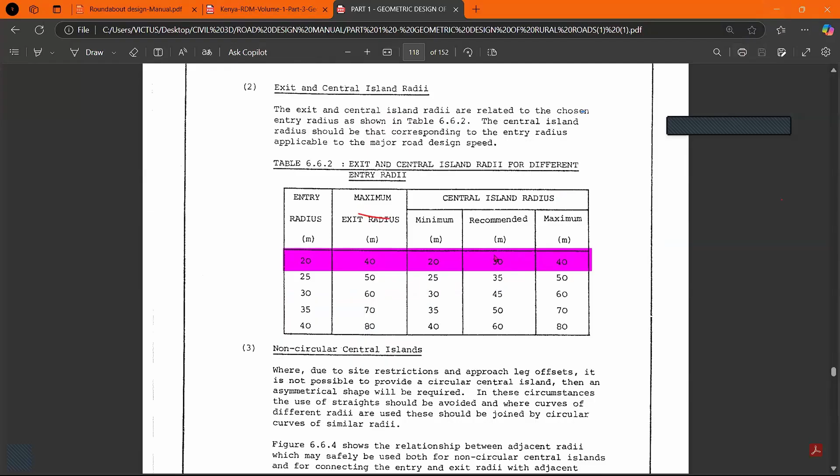And then you find that for the exit, the radius is always very big. Why is that the case? Okay, not very, very big, I take that back. The exit radii are comparatively higher than those of the entry radius. Why? We are forcing vehicles entering the roundabout to lower the speed. But after making the maneuver, we want them to at least accelerate so that we don't have queuing within the roundabout. That is one of the rationale.

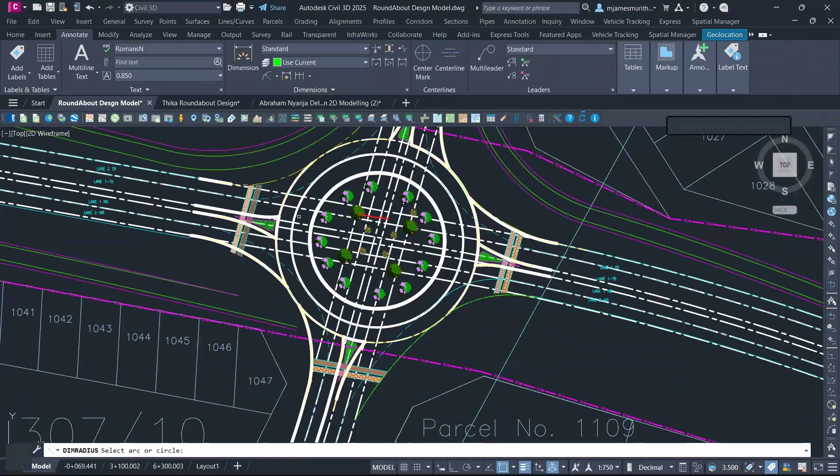But again, the radius should not be too big, because if it's too large, it means the vehicles are going to kill the road user or the pedestrian at this point. So this is a critical aspect, balancing the two. Let's measure that. I'm going to annotate radius, and the radius here, I'm going to select this one. So you can see the radius here is 35 meters.

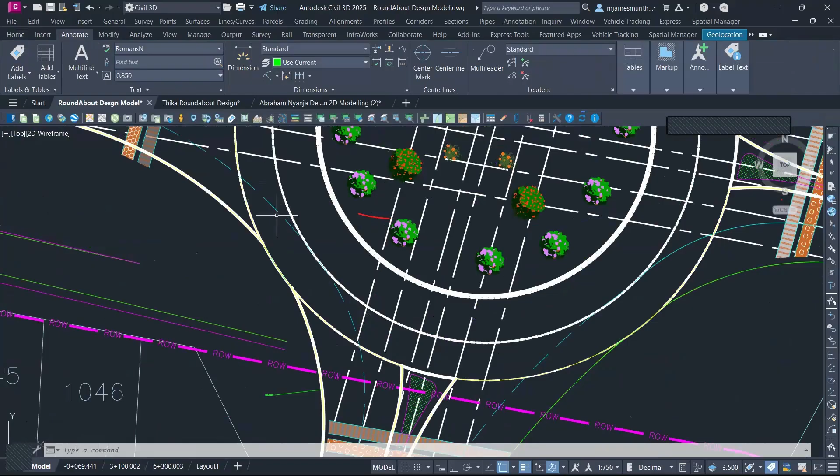If we talk about any design vehicle, it means that any design vehicle is possibly going to be able to pass through this section. It is able to negotiate if they wanted to make a complete left turn at this point. And we say the minimum turning radius for a truck is around 17.5 meters, then you can be able to make a complete turn in that case.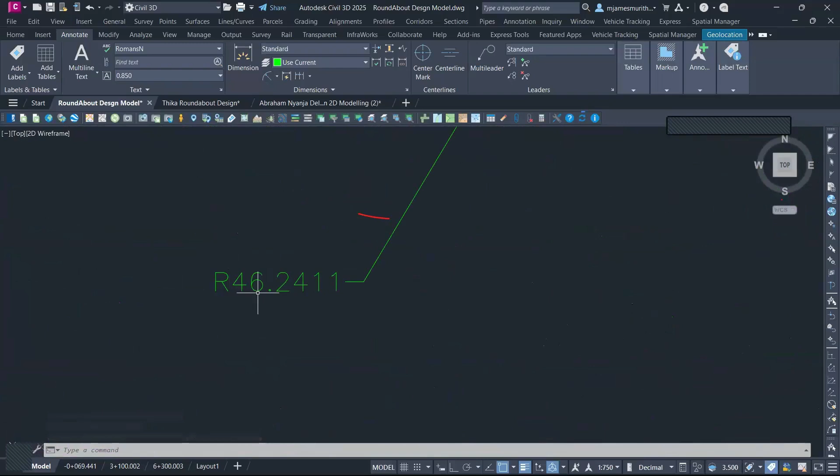If we check the radius for the exit, you can see it's comparatively larger than the entry radius. This is like 46 meters. That's like 10 meters higher. So the vehicle will be able to at least accelerate out through this section. Some other thing that I want us to check is the central island. So this is the central island, and we can see the diameter is around 40 meters.

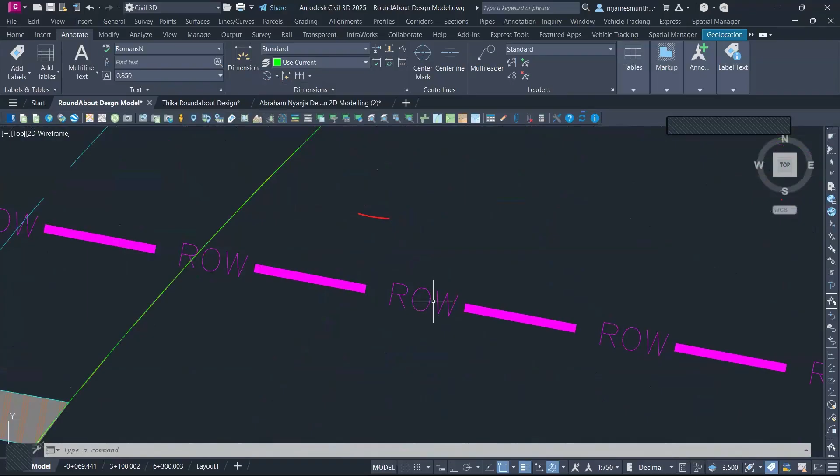So this one, you can see the right of way. This is the right of way. This is the right of way at this point. And also you can see this is the right of way. So ideally in our design, we wanted to utilize the entire road reserve in this area.

But then also the size of this central island of the inscribed circle determines the kind of maneuver and the movement that we expect to have around the roundabout. So this is the optimal distance. We'll be talking about it. It's balancing between, of course, the available space and then also the speed analysis that we will be able to carry out. The other aspect that we need to look at is the circulatory lane.

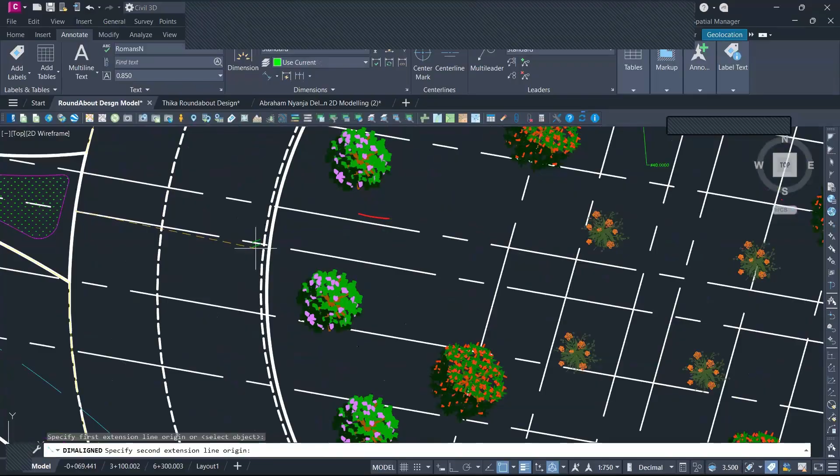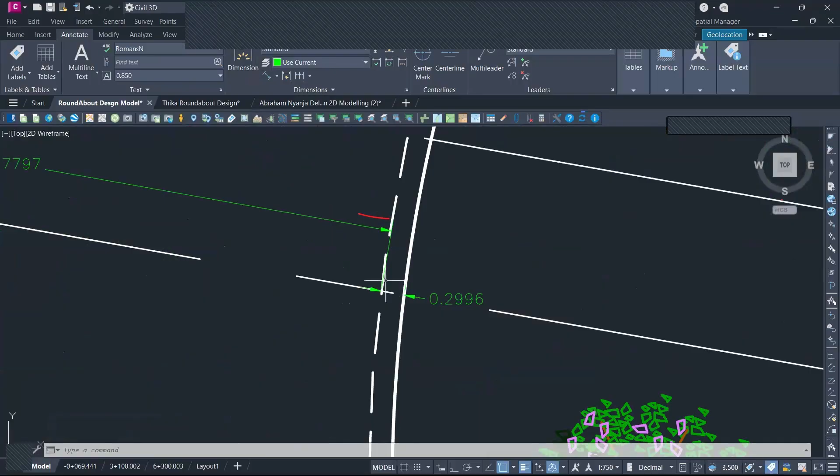So if we measure the circulatory lane from this point to this point, you can see this is around 10, and this is inclusive of the central island or the apron. Okay, this is a curbstone of 0.3, so we don't have an apron. We just have a curb. This is a raised curb because this is a double lane roundabout. So you must be able to have a raised curb around this section.

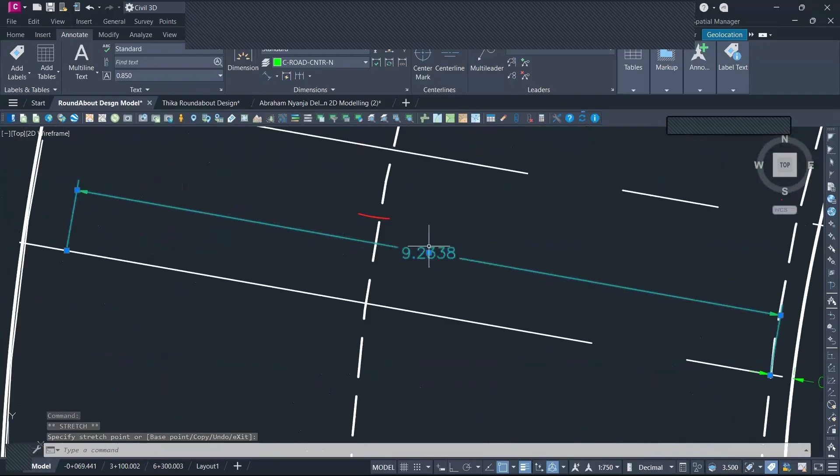You'll have your lanes here, and of course the clearance. There is a clearance of like 0.6 meters from this point, and you see what is left is around 9.1 meters as the width of the circulatory carriageway, just like it's recommended.

Then there is always the question of what is the appropriate location of these pedestrian crosswalks. There's always a rule of thumb that you can have at least one vehicle, one unit vehicle, from the edge. This is called the yield line. From the yield line to where you position your pedestrian crossing, it's always a range of between 1 to 3 vehicles.

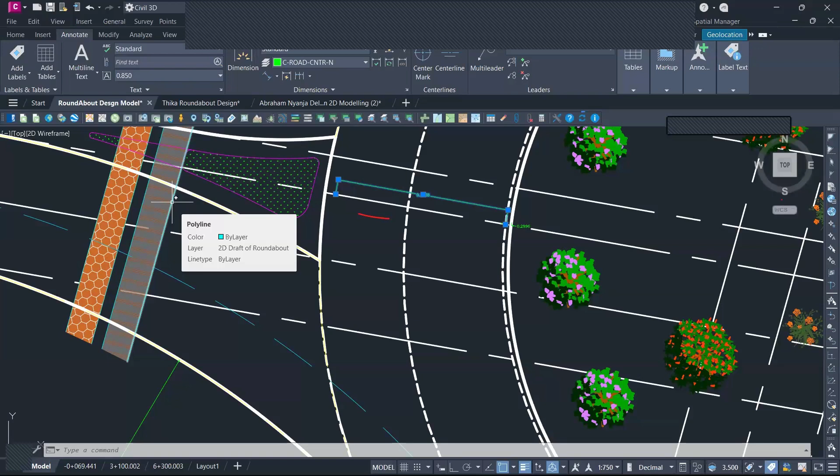So what is the length of one vehicle? We mostly work with, I think it was 6 meters or something. That's the length of the passenger car. And then you can double that, times 2 or times 3, to accommodate 2 to 3 vehicles. The other idea is you don't want it to be too long because it's going to encourage queuing, and you also don't want it to be very short. So ideally, I think for this case, we used 2 vehicles.

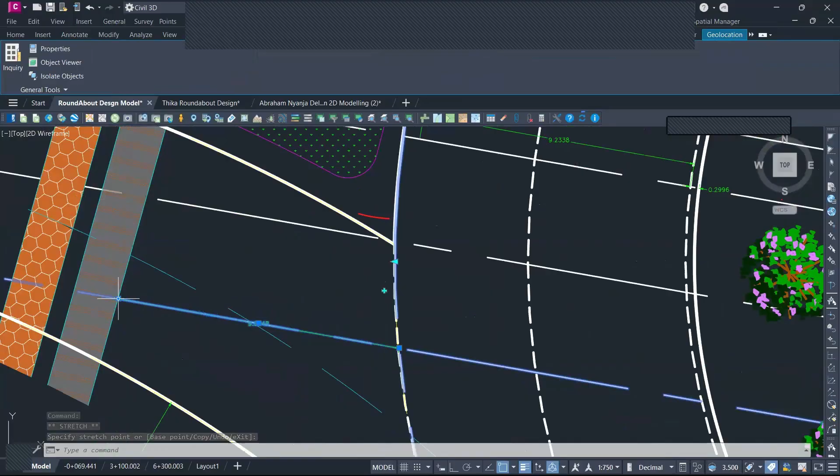I suppose that's the case. Yes, it's around 10 meters. Let me measure it appropriately. Yes, it is around 10 meters. Those are like 2 vehicles that you have here, and that works for us in this design. So remember, all of these parameters are dependent on site-to-site conditions. So don't fixate your mind on anything. And that's how you get to do the design.

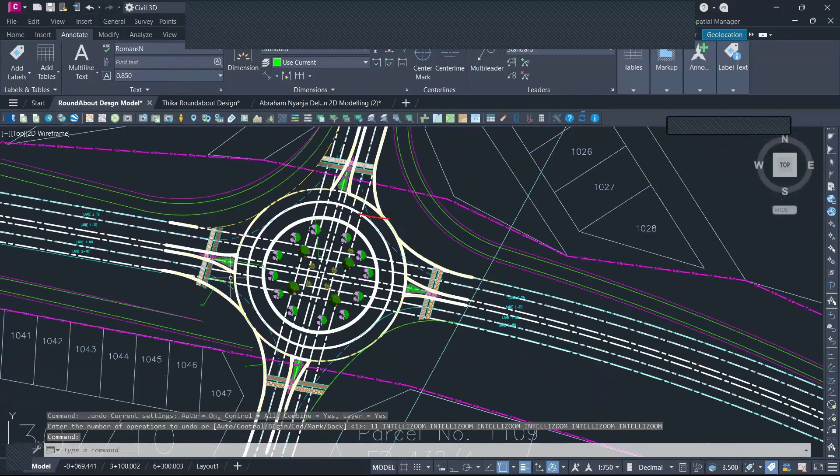So I think I'm going to run super fast in this section. So this is a complete design. We have 2 roundabouts. So this is the first roundabout. This is a double lane roundabout. There's the splitter island. There's a whole science that goes around the splitter island because it's like a safety haven in roundabout design. And then after that, we have a staggered intersection. We'll be working on that.

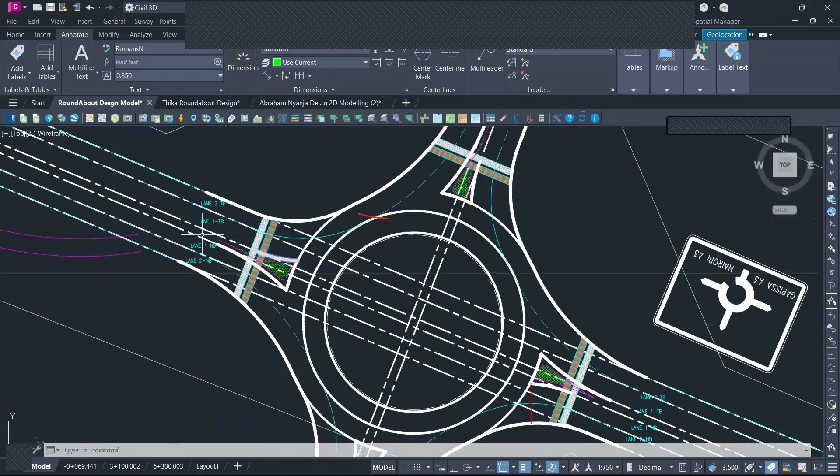But then also we have another roundabout on this other end. This is the second roundabout within this project. And then after that, we have T-junctions that we'll be able to model that are very easy. These are the T-junctions. So ladies and gentlemen, I hope that this at least has built some background information on what this section entails.

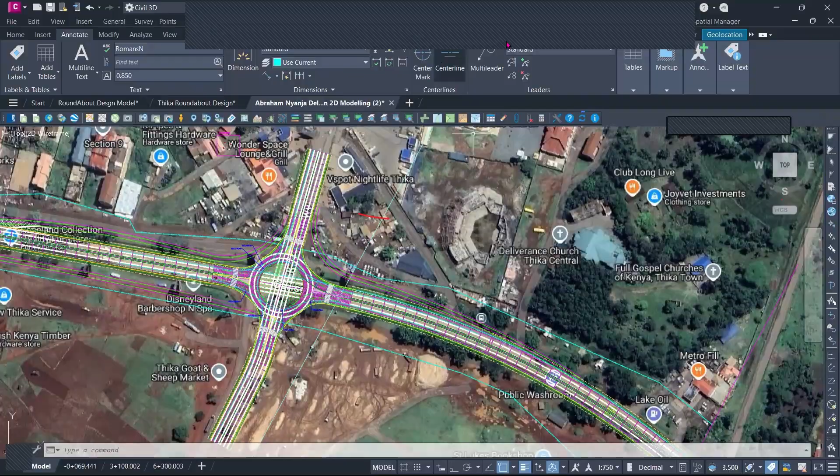And I can see Job is talking, Samuel is talking MTB model. MTB, model town board. It's always important when it comes to any driving school. So as you go into designing any roundabout, the principle is think like a driver, think like a pedestrian, think like a technical engineer, think like a safety engineer, think like a construction man, and think all round as a spectator, or as also the person who is funding the project. Otherwise, your project will never see the light of the day.

So I hope that this session has been able to at least paint a picture of what goes around the design of roundabout. It is such an extensive area. I think the manual is around 2,000 pages. So I could not be able to cover everything today, but I've tried to the best of my ability. And I hope that at least you've been able to gather one or two.

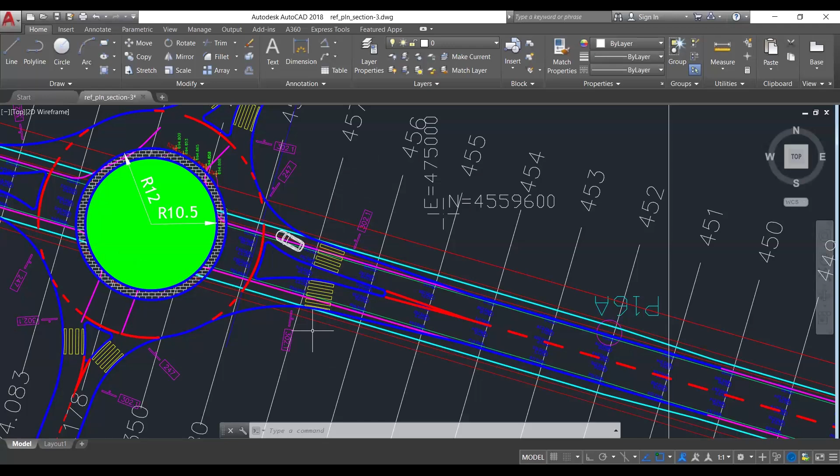And now with this roundabout that I did, we minimized accidents, and also we made a connection for people, for pedestrians, because in this site we had a local road, and people here didn't have pedestrian crossings, and with the new project we designed crossing lines so that pedestrians can go to the other side. And this is an interesting case that I did for one town in my country.

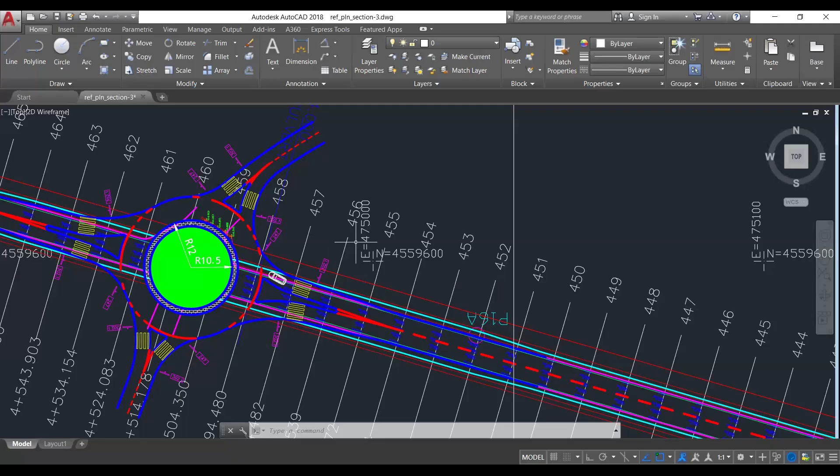And your lesson here, I was so grateful, so much information. And also I visited Africa. I was there 2 times now. I was in Tanzania and now I was in Seychelles. And I saw rules of communication, how traffic goes. It was so beautiful, interesting. And maybe one time I want to come to work in Africa. It was good. Thank you, sir. All right. Thank you very much. That's a very good design. Thank you for sharing. And I agree with you. It's good to know you were in Tanzania. Thank you very much for sharing.

Thank you, sir. I want to ask, how do you connect an existing road with the roundabout? That's super easy. We do the design of the road profiles. And in that case, you have the elevations of the existing road, and then we look at the horizontal alignment or the layout design. And then there is also the design of the vertical profiles of the roundabout, to make sure that you interconnect all of these elements of the roundabout.